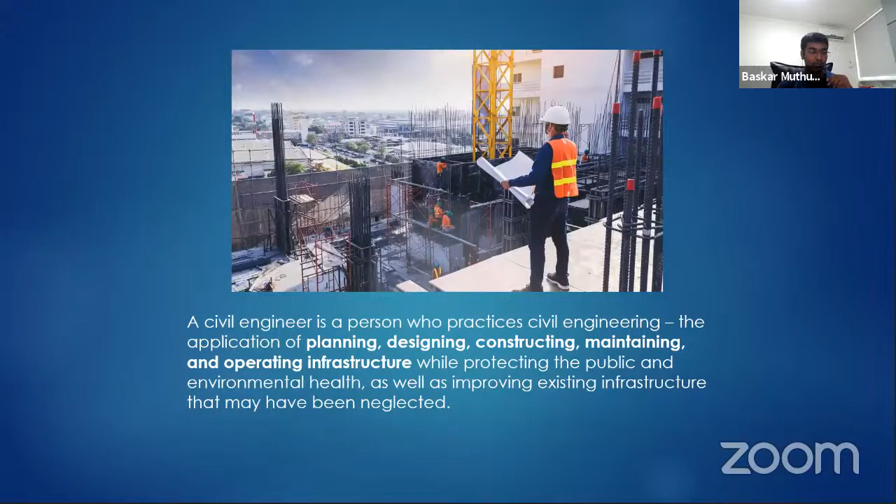So what is planning? What is design? What is construction? We'll go into one by one. Coming back to the planning, sometimes we need to know what is the future needs of our country. Let's take for example the metro rails that they have been constructing recently in India, or the various roads and bridge structures - all these are urban developments. These developments are forecasted by the various government authorities, like the Indian Engineering Service. They have a lot of engineers who sit together to think what the future of the country needs.

So let's say, for example, we want to improve the transportation infrastructure around our city, because you want to convert this city into a business hub in the next 10 years. So what are the infrastructures required? This is the planning, about seeing like 20 years or 50 years from now what the country needs.

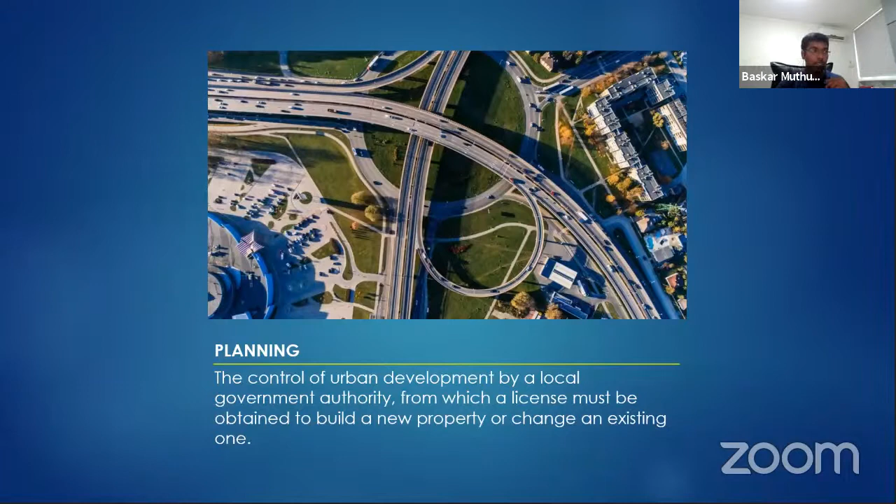And then designing comes after the planning. So after you have planned, yes, this is what my country wants in the next 10 years, or my city needs in the next 10 years, then from today until the end of 10 years, what are the things I need to do? And then designing it, going into the detail of how it's going to look like, how big is it going to be, from which point to which point is it going to be - that forms the designing phase.

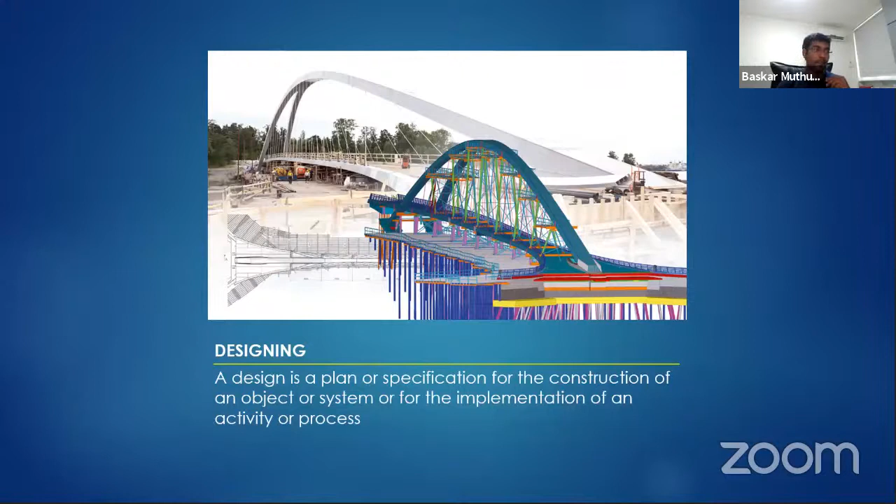Most of the civil engineers work on this aspect. And then comes the construction, actually realizing the vision that we have set during the planning stage, and the various details that we have designed during the design stage. It comes into reality during the construction.

I still remember those days when I used to go to school. I see the metro rail being constructed. I see some viaducts on top, and I wonder what is it going to look like towards the end of this project. That was one of the motivations that I had as a kid, which kind of drove me towards civil engineering.

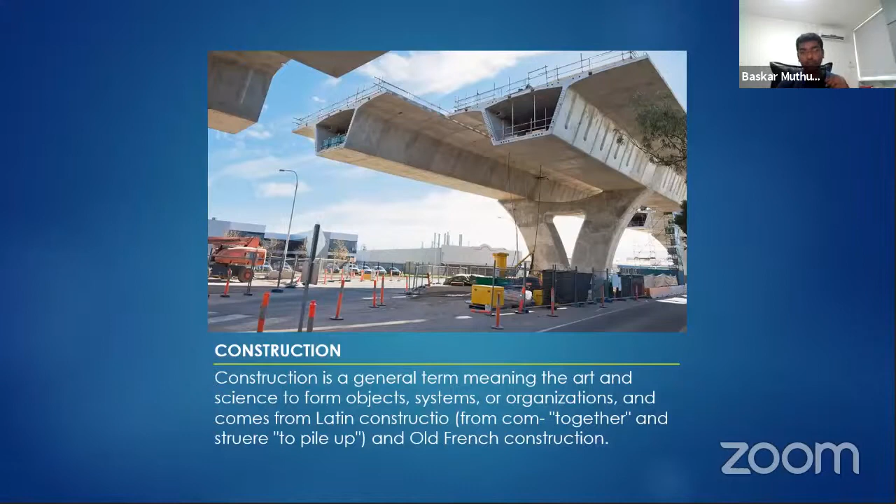And what's maintenance? Just like us human beings - we all grow old, we get stronger, and then there's a peak performance when we are at our best. Usually as teenagers, you guys are at the best of your health. And just like humans, structures also age. So as the structure ages, we need to study, monitor whether the structure is still safe for use, because there's a lot of people using the bridges every day, a lot of people using the trains every day. So are these structures still intact?

This comes under the maintenance. So maintenance involves monitoring and controlling the infrastructure and doing necessary treatment to the existing structures to make sure that the infrastructure is still safe for use, or the development which I mentioned earlier.

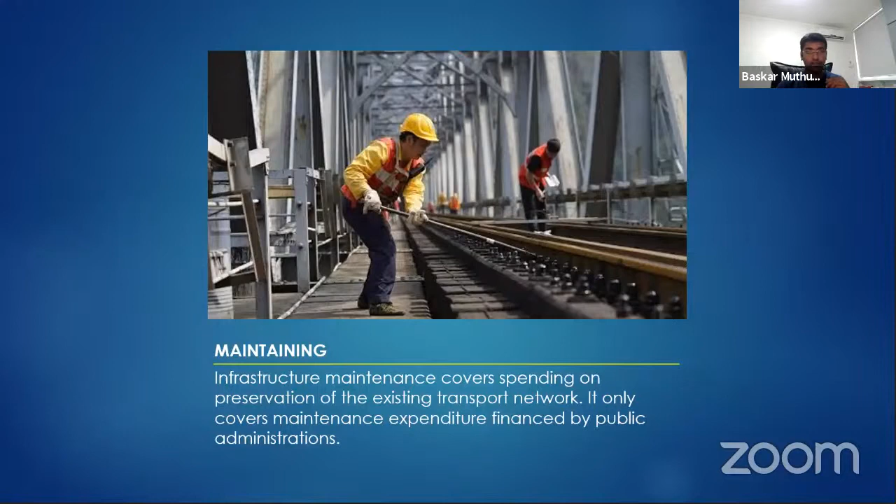And operations - this is another phase. Let's say we have constructed a road. So 10 years from now, the road is already ready, right? A lot of people are using it. Is there any traffic jams? If there is a traffic jam, then what has to be done?

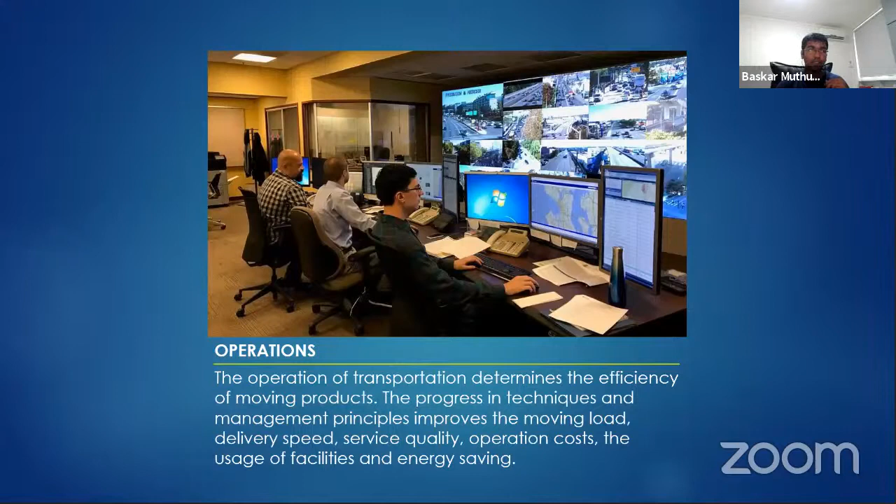This involves a lot of analytics, what people call data analytics, right? So people monitor the performance of this infrastructure on a daily basis. How is it operating? It involves a lot of technical skills, and then trying to come up with some minor modifications, which is not so expensive, but at the same time helps you to achieve the requirement of the community. So that forms the operations of an infrastructure.

So broadly, the planning, design, construction, maintenance, and operations - this is what a civil engineer does with regards to the developments around you. So all the developments around you, you will observe all these five stages of things happening. Take for example your house.

The first time when you wanted to build a house, you plan, right? You guys think, oh, my house has to be like this, maybe together with your parents, you discuss - I want the rooms to be here, I want a balcony here and stuff. And then when you go into the design, you go into the detail aspects of it. That's where the engineer comes in. He comes up with the solid foundation for the house, and then the various structural elements. You see all those walls which is carrying your house, those are the structural elements. All those has to be designed during the design phase.

And then comes the construction, which most of you would have been familiar with - you would have seen a lot of construction things happening around you. And then the maintenance is where you live in the house, and you maintain the house. Let's say every 2 years or every 5 years, you paint your house, and you check whether there's any cracks in the house, and you do some minor alterations and modifications to it.

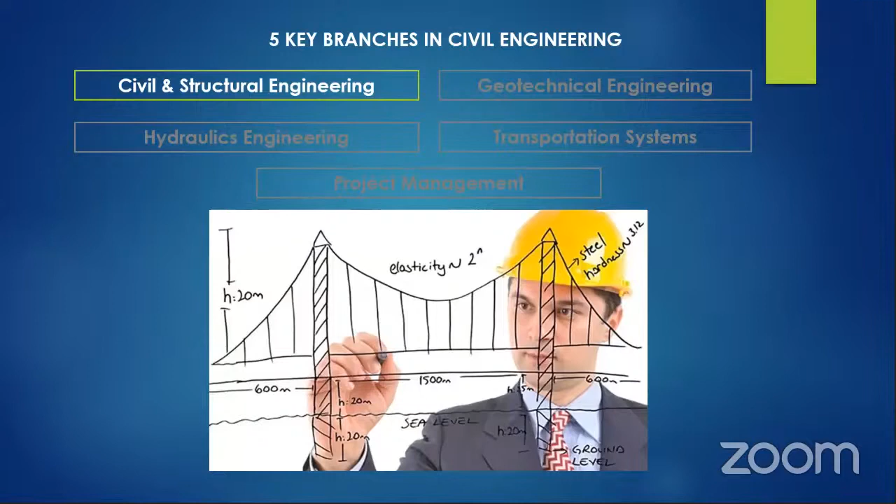So when doing this kind of underground structure, what is the challenge? It's not just creating a small hole, because when we go underneath the soil, there's a lot of structures above ground. Say for example there's a line of high-rise buildings, and you're doing this underground construction - then there's a lot of risk involved to those buildings above ground. So how do we manage this? That forms the geotechnical engineering we're talking about. In this field you study the geology, the soil, the different types of soil, and how to manage the various types of soil in order to construct this underground infrastructure.

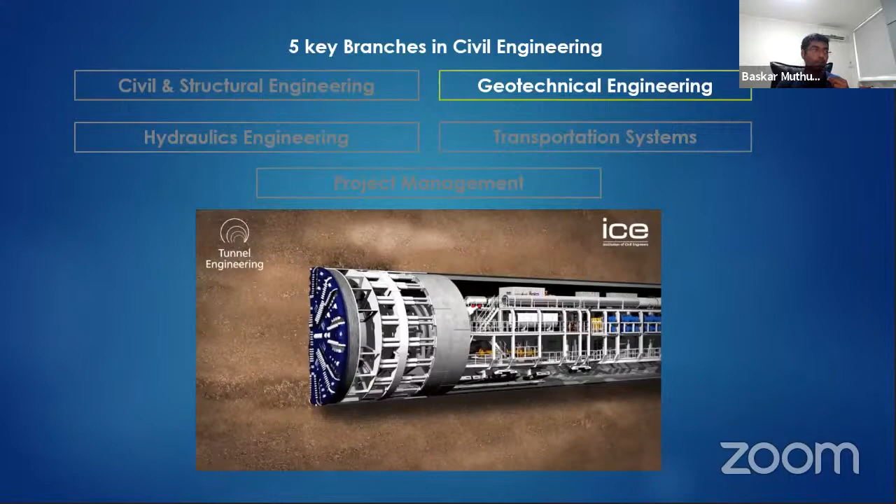Next, we have hydraulic engineering. I come from Chennai, so I have sentiments related to a particular incident where there was heavy rain a few years ago, and almost the whole of Chennai flooded.

So what actually happened? Rain is a very common phenomena. I'm sure you all know the science behind how rain happens. When water droplets from the sky come onto the earth, where does this water go? This earth is a small sphere, and there's such a big sky out there with so much humidity. So where does this water go, and how is it channeled? If there's a dam, how do you construct it such that the water doesn't overflow and affect the surrounding infrastructure? That comes under hydraulic engineering. This is a very important part of engineering because it determines the water supply for the city.

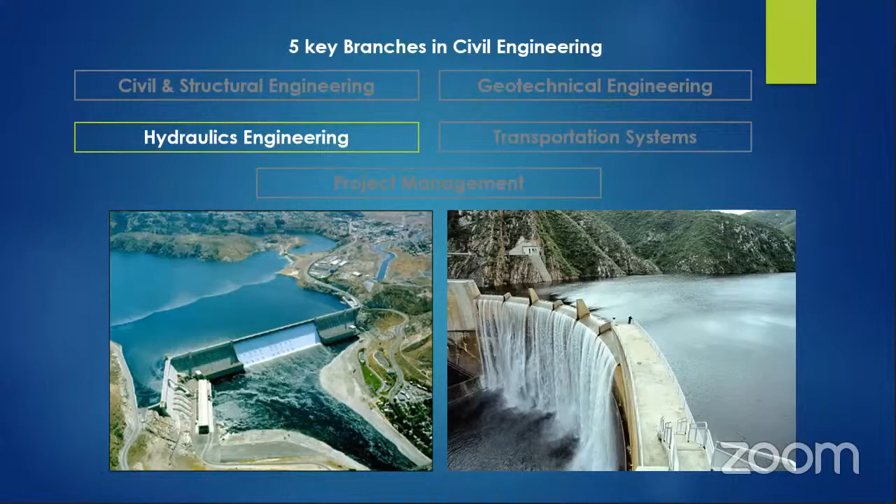Next, we have transportation systems engineering, which has a core focus on transportation. So you want to operate a train. How does this train run? You need tracks for the train to run, and you need power supply for the train. So how do you supply these resources to the train in order for it to run from one point to another? And then there's demand and attraction.

What is demand? How many people want to go from point A to point B? Take for example, you want to go from Trichy to Chennai. Let's say we have one train that can take 5,000 people. Then what is the demand, and does this demand meet the supply? If 10,000 people want to go from Trichy to Chennai on one day and only 5,000 can travel, then the need for another 5,000 people is not satisfied.

So who comes up with this kind of planning? How do you know how many people want to go from Trichy to Chennai today? That is where transportation systems engineers come into the picture. They study the data, they go through the details of the past - what happened yesterday, what happened the day before, what happens on the last few Fridays, what happens on the last few Thursdays. So how many trains should I operate on Friday versus Thursday?

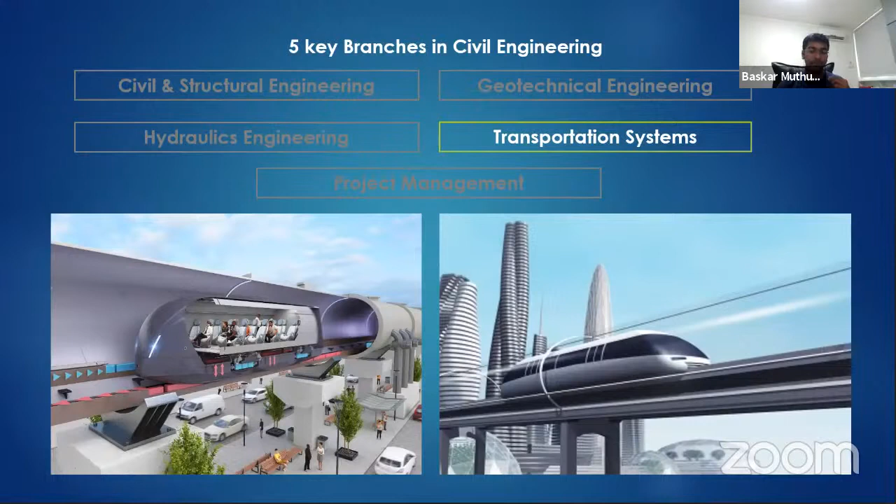But what is the difference between 1 year, 5 years, and 10 years? How much am I going to spend if I construct this building in 1 year versus 5 years? This comes under project management, because you only have so much time - you need this infrastructure developed by a certain period. So you have a limited time and a limited cost, and there are so many things that have to be done before the building can be completed and open to the public.

So that's where project management comes in, where you manage this construction project all the way from initiation to planning to execution to maintenance, which is performance and monitoring, and to closing, where you finish the project and make sure everything is safe before people can use it. So that forms the project management part.